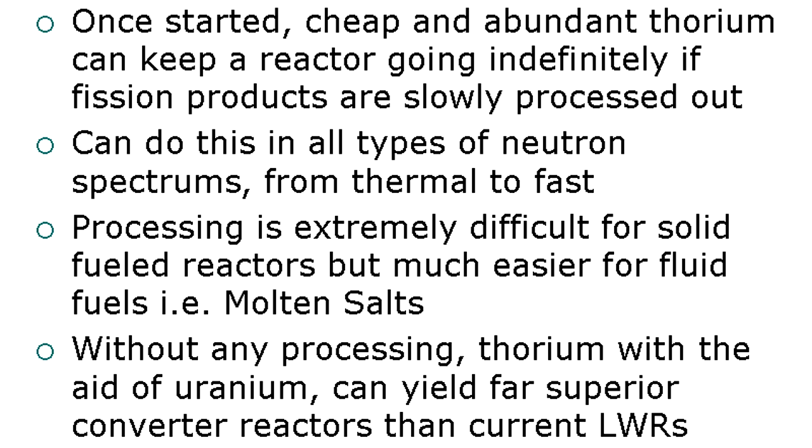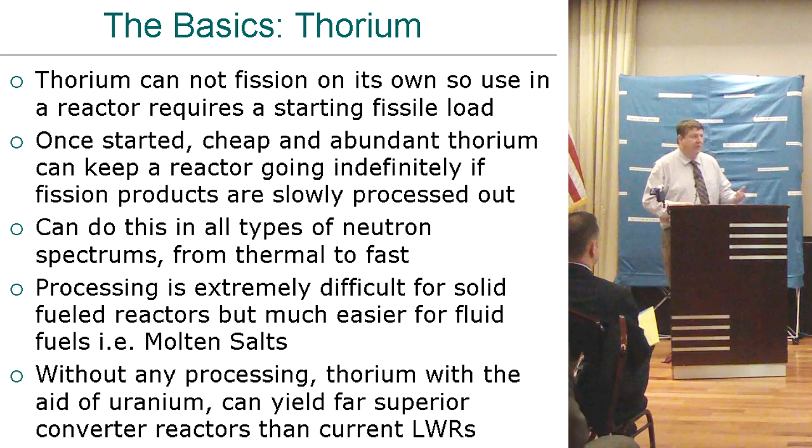Processing of thorium, or processing in general, is extremely difficult for solid fuel reactors. That's why there's a little bit of interest worldwide, but really not that much. But since we're dealing with fluids here, it's much simpler for fluid fuels like our molten salts. It's easier processing, but it's still a challenge, and there's going to be a lot of R&D money needed to bring that forward. Without processing, thorium can be used with the aid of uranium. A little bit of low-enriched uranium can yield far superior converter reactors, or the simpler burner reactors, than our current light water reactors, LWRs.

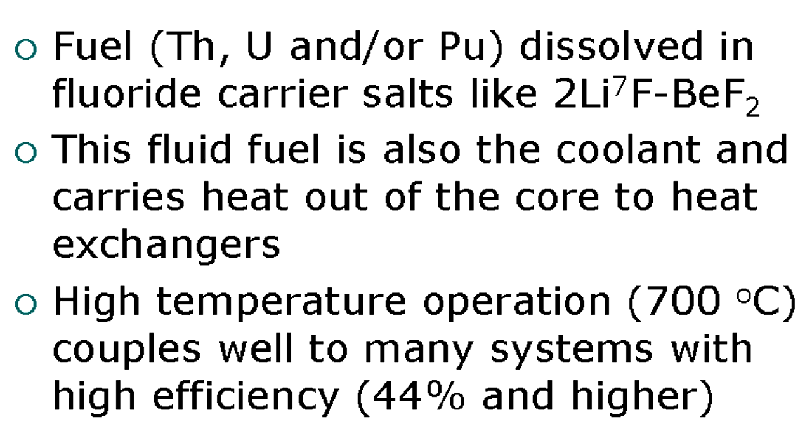Now, a little bit of basics about molten salt reactors. Molten salt reactor is the more broader term. LFTR is a bit narrower and a bit newer. But in general, our fuel, which is thorium and/or uranium and/or plutonium, is dissolved in a carrier salt. FLiBe is one of the examples, enriched lithium and beryllium fluoride. This fluid fuel is also the coolant, and it carries heat energy out of the core to heat exchangers.

It's a very high temperature operation, typically around 700 degrees, so that couples very well to almost any kind of power system you might imagine. A lot of us are going to be talking about Brayton systems, supercritical carbon dioxide, helium, etc., but it matches very well to general ultra supercritical steam as well, what the coal burners are using right now. So we can use off-the-shelf technology as well, even things like open air cycles.

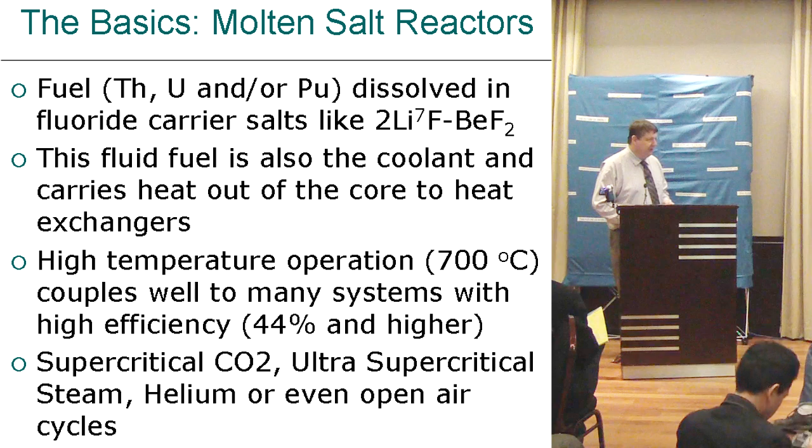The textbook design is called the single fluid, graphite moderated molten salt breeder reactor. This is straight out of the Gen 4 program, Generation 4 program, to look at advanced reactors for the future. This is one of 6 of them. In this design, the core itself is just a large tank filled with graphite logs, basically, that the fuel salt flows in, and in the reactor it's critical, so heat's generated.

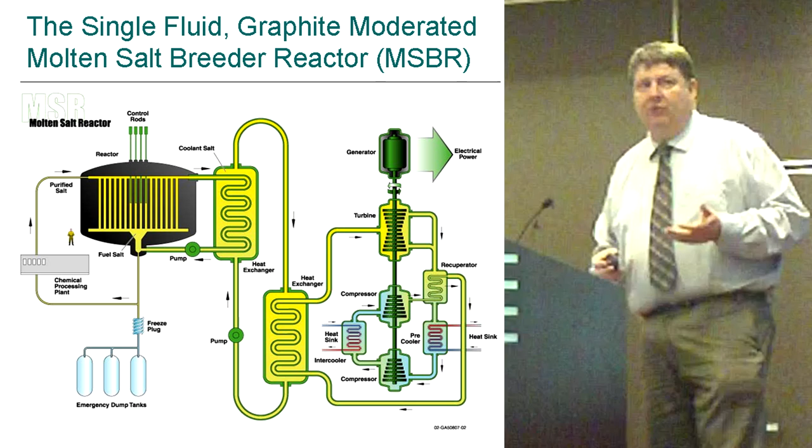Then that same fuel salt flows out to a heat exchanger, gives its heat to clean salt, and then that clean salt will either, in this diagram, go to a Brayton cycle, or like I said, could be steam, could be almost anything. Near the bottom we have this freeze plug. So basically if anything goes wrong, we lose power, etc., that freeze plug will melt, and the salts are drained to tanks that are specifically built to deal with that decay heat.

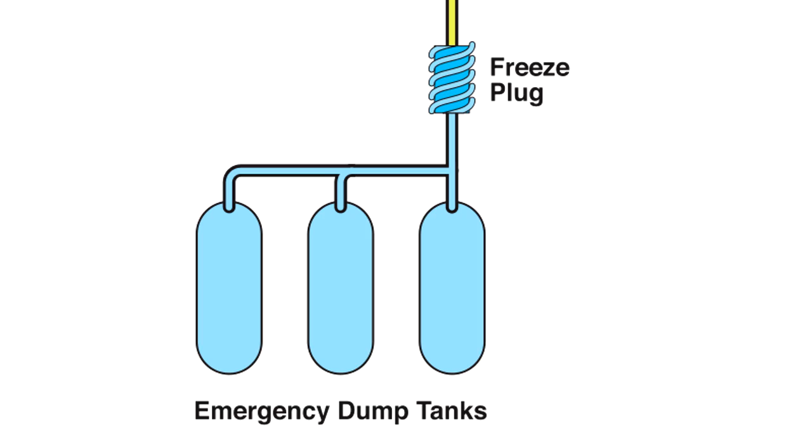There's a lot of design choices. One is breeder versus converter. Breeder means it makes your own fuel after you start it up. And if we just make just enough to keep going, that's nice because we don't have to worry about shipping out any fissile material, etc. We call that break-even breeding, and most of us feel that's the way we should be going.

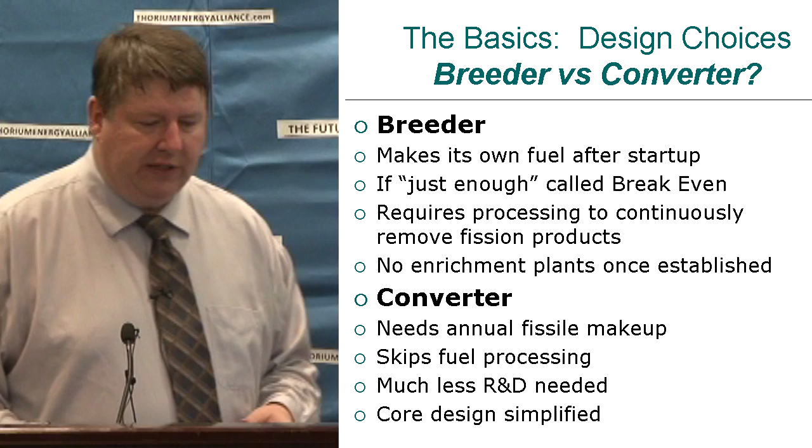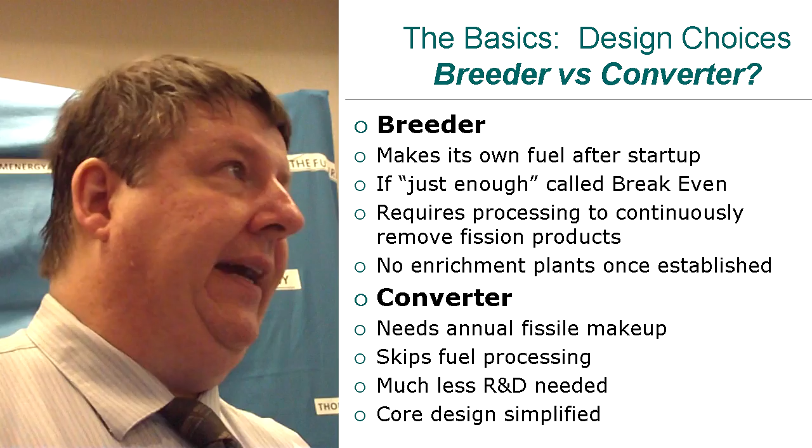That requires the processing of the fission products to continuously, fairly slowly, but continuously remove them. So we might need some enrichment plants now to get them going, but once we're going on them, we don't need enrichment plants anymore. Converter reactors, on the other hand, need some annual fissile makeup, which is typically going to be low-enriched uranium. But that skips fuel processing, or at least skips it for decades, and we do it once at the end of the sort of lifetime of the salt, etc.

Much less R&D needed, much simpler designs. We're much more ready to go with things, and the core design is typically much simplified. There's also what we call the single fluid or two fluid, and even confusing, there's something called a 1.5 fluid. Single fluid, everything is one carrier salt, as is fairly obvious. The core design is typically a fair bit simpler this way.

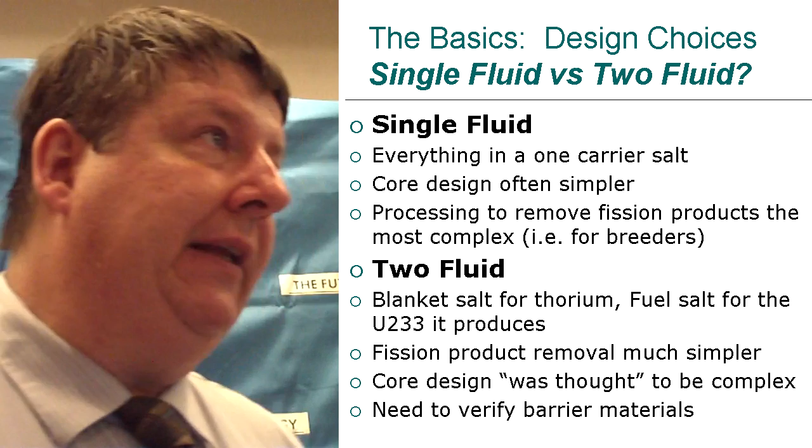Processing to remove those fission products is a lot harder. It's not as hard as with solid fuels, but it's the hardest way with liquid fuels, because thorium itself is very chemically similar to the rare earth fission products that are the most important ones to remove.

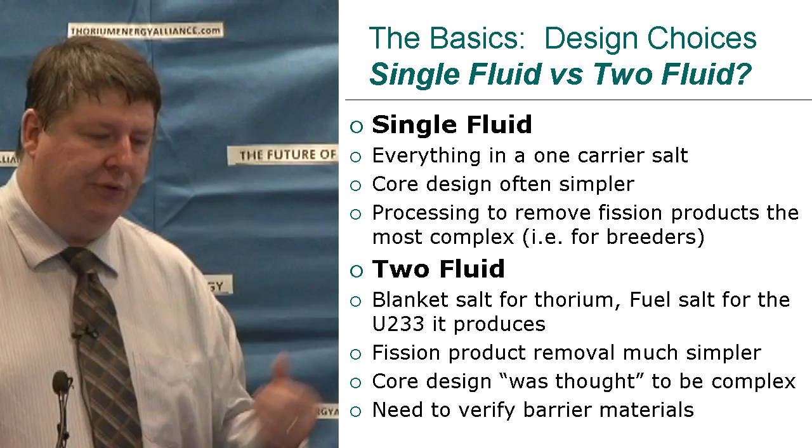Two-fluid designs, on the other hand, have a separate salt for the thorium that catches neutrons, and a fuel salt for the uranium-233 that the blanket salt produces. Fission product removal is a lot simpler because the fission products are produced in the fuel salt and there's no thorium there, so it's a lot easier.

Core design was thought to be a lot more complex. What Oak Ridge looked at - they developed these in the 50s, 60s, and 70s - was very complicated. We think there's a lot easier ways to do this now. But with pretty much any kind of two-fluid design, we have to verify these barrier materials. It could even be graphite itself, but there are a lot of different choices to separate those two salts. Shouldn't be very hard, but it's something we need to do, and anything nuclear can be quite expensive.

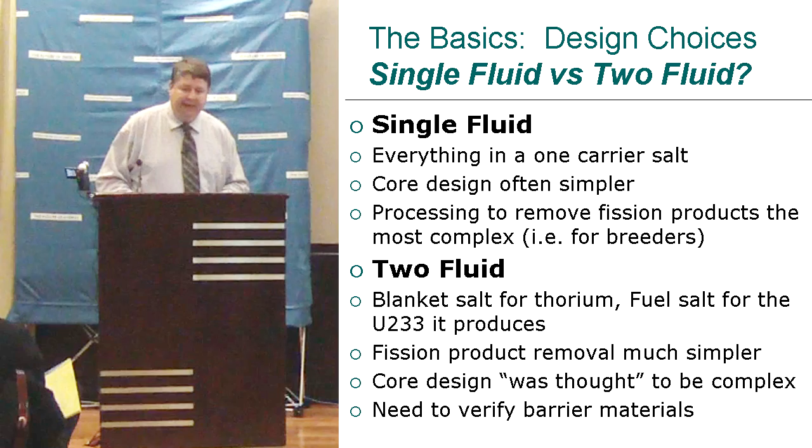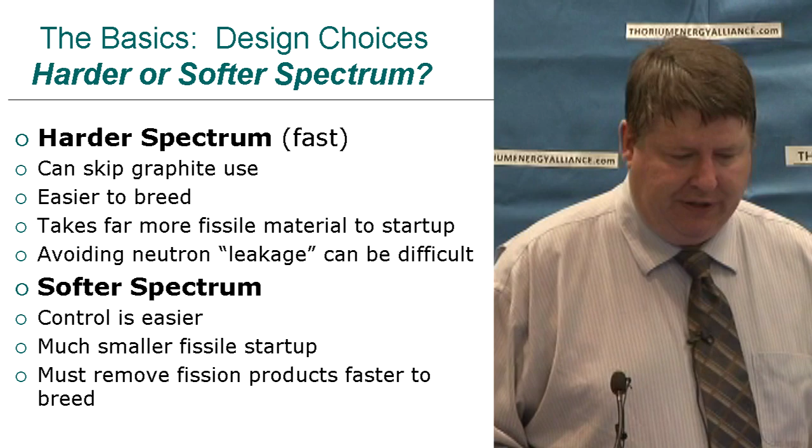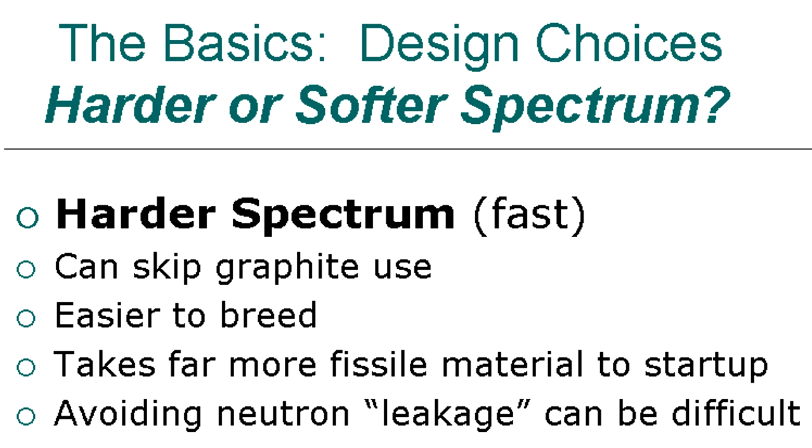Then we have either harder or softer spectrum, between thermal and fast spectrums. With a harder, or fast, spectrum we can skip using graphite. Graphite's not really that hard to use with these reactors, but if we can get rid of it, it's probably a good idea too - just one less thing to worry about. It's easier to breed, we get more neutrons per fission, etc., although it typically takes a lot more fissile material to start up, with some exceptions, but that's a general rule of thumb. And avoiding what I call neutron leakage can be a problem. In a harder spectrum design, especially in the single fluid, it can be harder to avoid losing a lot of neutrons to leakage - we have this neutron budget we have to worry about.

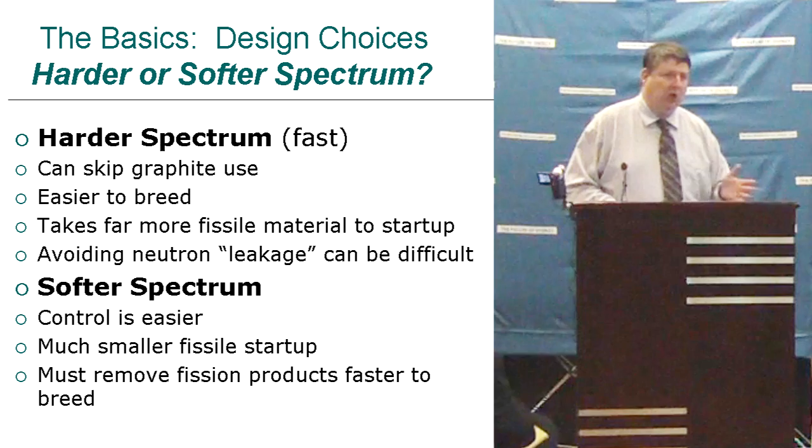With a softer spectrum, control is a lot easier as well. Things happen a lot slower with thermal neutrons. Much smaller fissile material needed to start up, but we need to remove those fission products faster if we want to breed or break even.

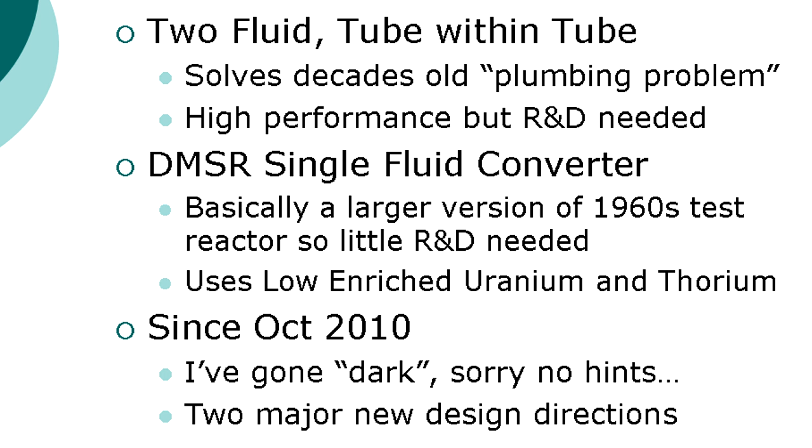Now, my main design efforts have been in a two-fluid design, what's called a tube-within-tube. Hopefully it solves what Oak Ridge often termed their plumbing problem, which is the complexity they had to deal with. It's a very simple geometric sort of trick, in a sense, to get good size power cores out of this two-fluid design with much simpler plumbing, so to speak. I consider it high performance, biggest bang for your buck, but there's significant R&D needed in this design, and in most designs.

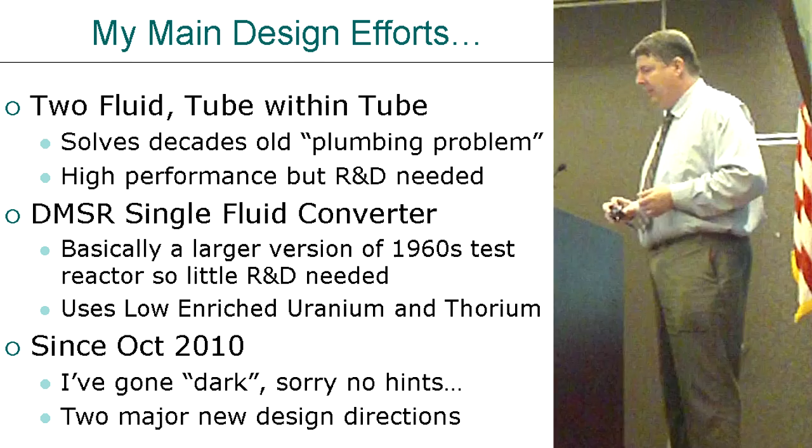My other main focus for the last couple of years has been on what's called the denatured molten salt reactor, DMSR. This was developed in the late 70s at Oak Ridge National Labs. It's a really simple design - basically just a larger version of the test reactor they built in the 60s, so a lot less R&D needed. It doesn't break even though, so it needs a little bit of makeup fuel, which is low enriched uranium, very, very much available. So it uses a mix of low enriched uranium and thorium. Most of the energy comes from thorium, but it's helped along by that low enriched uranium.

Now, since October 2010, though - to use a term Jim Kennedy was using about the Chinese sometimes - I've sort of gone dark. I've been working on a lot of new areas, but instead of going public right away with a lot of them, I'm keeping things a bit secret. So sorry, no hints, but quite excited, looking forward to sharing these with you.

Now, how do you judge a reactor in general? That then guides us to what sort of design criteria we should choose. Of course: safety, cost, resource sustainability, and long-lived waste. I think these are really the most important, and pretty much every design we look at with molten salt reactors, these issues are very similar.

What can be a little bit different between designs is proliferation resistance. We have a good story in all our different types of designs, and it's a bit of an apples and oranges comparison - hard to make a really detailed comparison, but I think some can be labeled as extremely high proliferation resistance. Rapid deployment capability: if we want to build these by the hundreds or thousands to really make a difference, can we? There can be some differences there. And then technological uncertainty - how much R&D we're going to need to move forward.

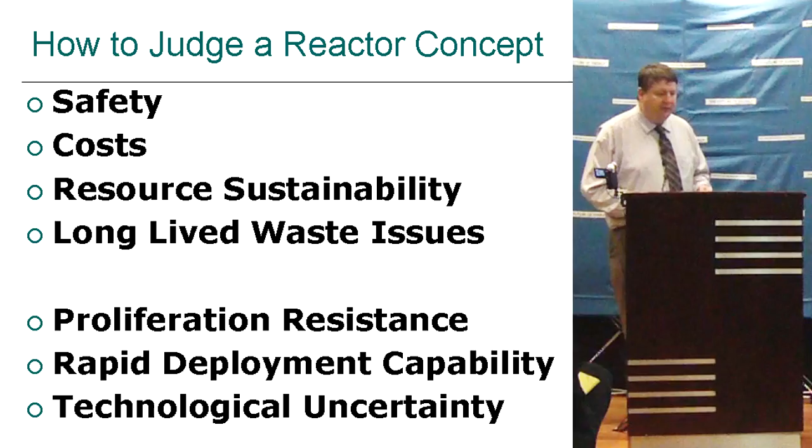Now, as I say, advantages of all molten salt reactors is the safety. We don't have large pressure vessels that could possibly fail. There's really no chemical driving forces here. We have no water, so no steam or explosions or hydrogen production. We have no zirconium water interactions, etc.

The graphite can technically burn, but that's about all it can do, and it's very simple to avoid that. And of course, some of our designs don't even have graphite.

There is almost no volatile fission products in the salt. All these accidents, Chernobyl, Fukushima, it's the volatile things that go off into the air and spread out. That's the real issue. It's almost impossible to imagine how radiation can be spread from a nuclear reactor beyond these things. They get into bizarre scenarios, the corium hitting water in a certain way, water getting inside the corium and then exploding. They really have to be imaginative beyond these volatiles.

But with the molten salts, those volatile elements come out naturally while we're running. We collect them and store them completely separate from the reactor. So if anything goes wrong, even a terrorist attack, a missile strike, etc., you might splash some salt around, but it basically lands and hardens, and very, very little will come out of it.

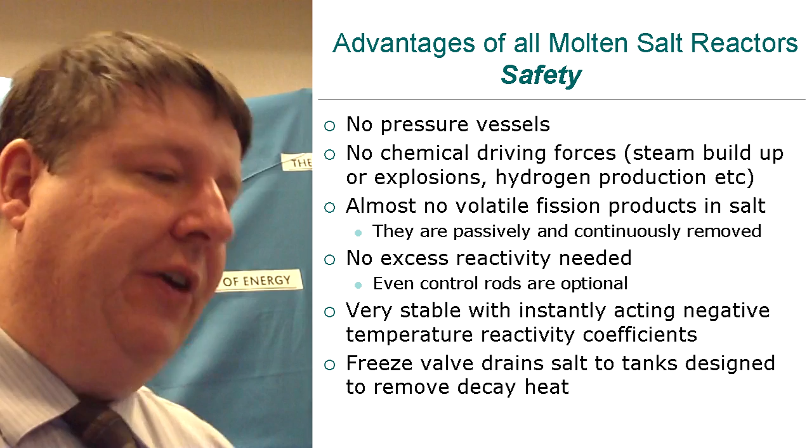We don't need any excess reactivity. There's no sort of shim rods or control rods that could be accidentally removed. We don't need any of that. They're very stable with instantly acting negative temperature reactivity coefficients. And again, we have that freeze valve to lead the core, lead the heat to where we can deal with the decay heat best.

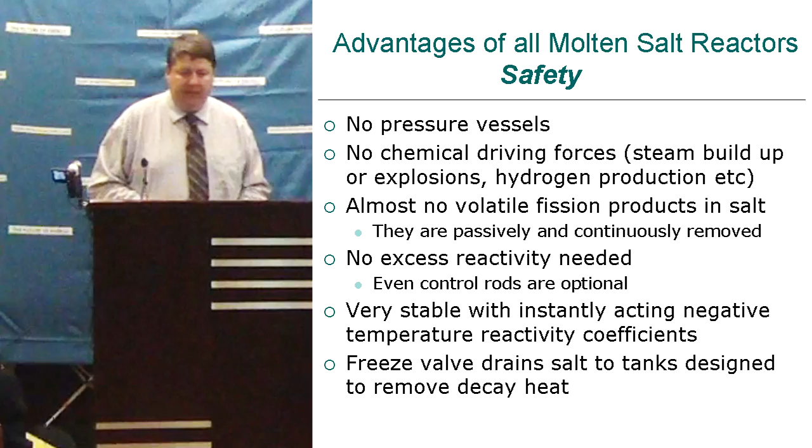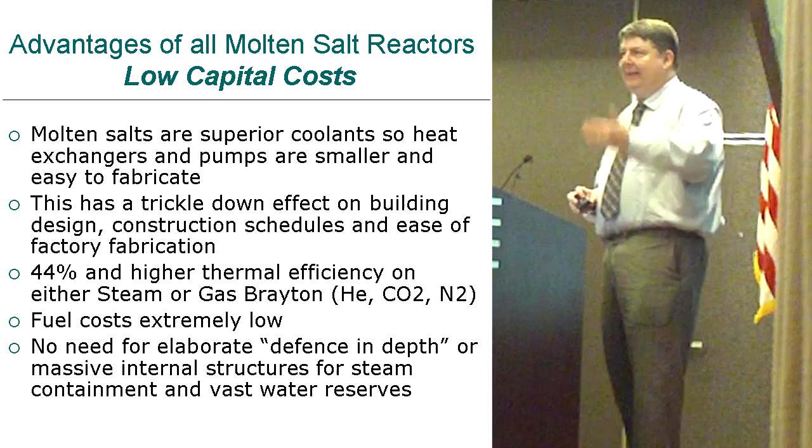Low capital costs. Molten salts in general, this is not quite as well known, are just excellent coolants, much better than water, much better than liquid sodium, etc. So your pumps are smaller, the heat exchangers are smaller, and that makes things a lot easier to fabricate. This has a trickle-down effect on your building layout, construction schedules, factory fabrication, etc.

Of course, we have a much higher thermal efficiency, 44%. We could probably push 50% with these, given our various choices, and that's another wonderful thing, that we have so many choices. And of course, the fuel cycle costs are very, very low, with no need for defense in depth or these massive internal structures to deal with steam containment and vast water reserves, since here things happen by physics, not by engineering design.

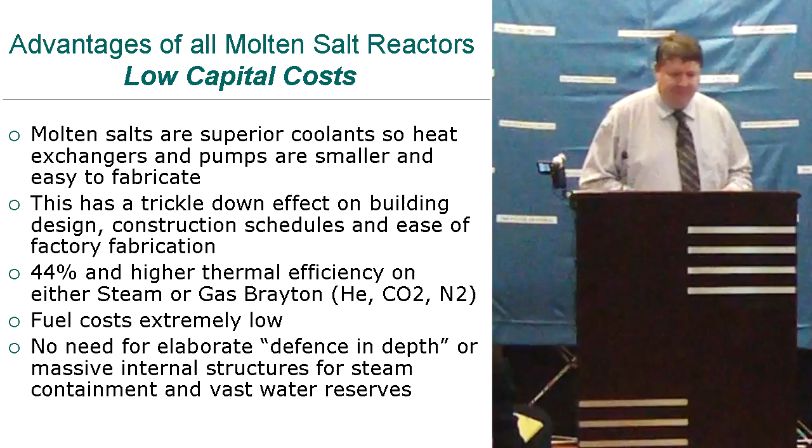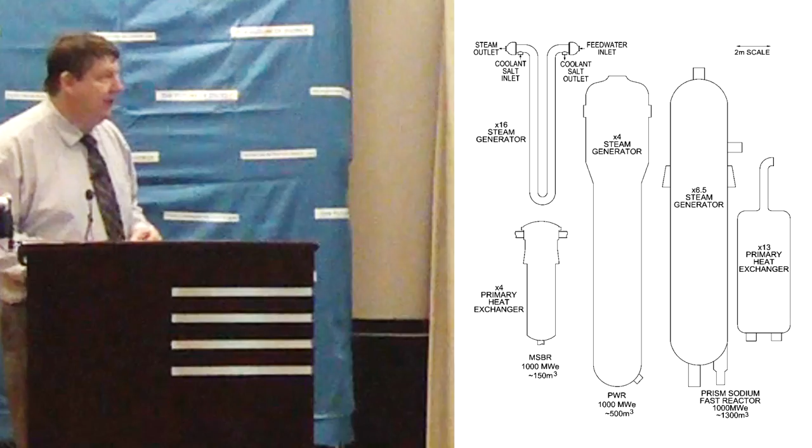Just looking at the size of the heat exchangers on the far left, we have the primary heat exchanger. We need 4 of those for a 1,000 megawatt plant and 16 of these tiny little steam generator tubes, versus in the middle 4 of those very large 70-foot tall steam generators that the PWR folks need to work with. And the sodium cooled fast reactor people love to show how tiny the reactor is itself, but they tend to neglect showing the absolutely massive water-to-liquid-sodium steam generators and their primary heat exchangers as well. So their volume is just an enormous factor compared to ours.

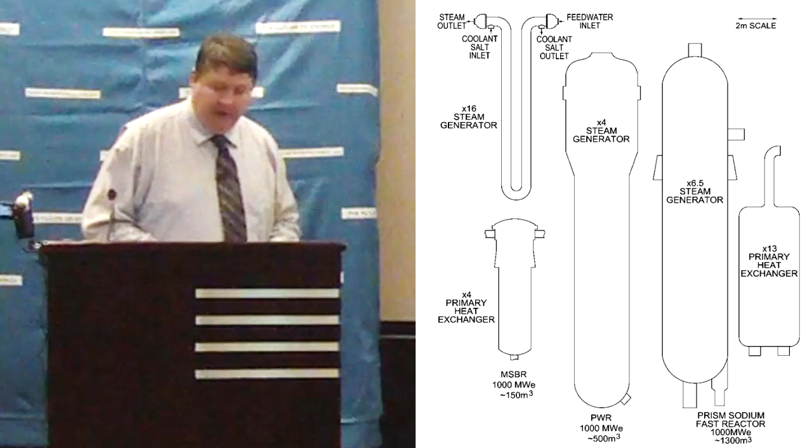Resource sustainability: once we start these breeder reactor designs, running them as breeders, all we need is minor amounts of thorium a year. About $30,000 worth of thorium gives you, depending on your price per kilowatt, about $500 million worth of electricity. Converter designs are a lot simpler and do require some uranium, but very modest amounts. Typically, Oak Ridge's base design, which we can improve on, was about 35 tons of uranium per gigawatt year for a 1,000 megawatt plant running a year, versus about 200 tons for light water reactors. That gets a fuel cycle cost under 1/10 of a cent per kilowatt hour, so there's not too much room for improvement there anyway.

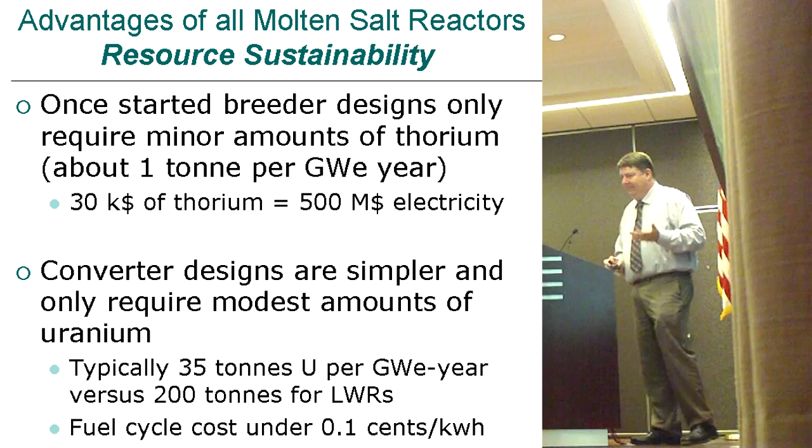And I would bring that up: uranium is not really the enemy. Thorium isn't amazing on its own, but these reactors can help us use uranium a lot better as well. We're not going to run out of uranium in 80 years. We can run out of cheap uranium, and that can start to hurt the light water folks because they need so much of it. But if you can find some competent geologists who know their field, they'll tell you there's no way uranium could ever be really more than $500 a kilogram, because then we'd have so much low-grade ore that would become economically viable. And even at $500 a kilogram in these designs that use it, that's still only a couple tenths of a cent per kilowatt hour.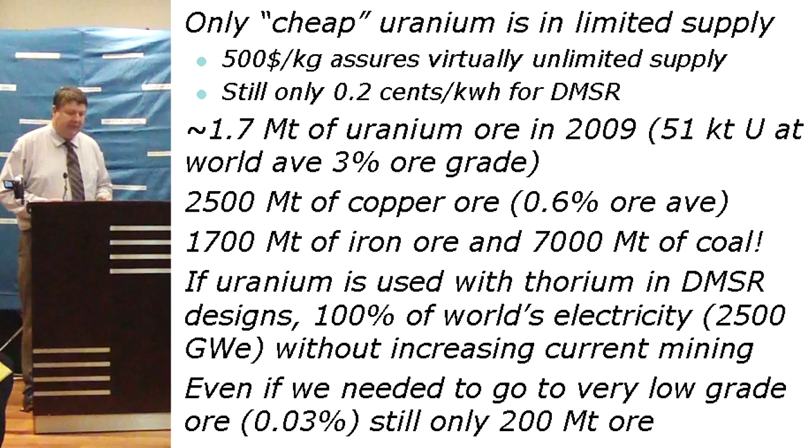Now, mining is maybe not pretty in general, but 1.7 million tons of uranium ore was dug up in 2009, at a world average of 3% ore grade. You have to compare that. Mining's not pretty, but there's 2,500 million tons of copper ore, 1,700 million tons of iron ore, and 7 billion tons of coal. So the mining picture here is a pretty minor one.

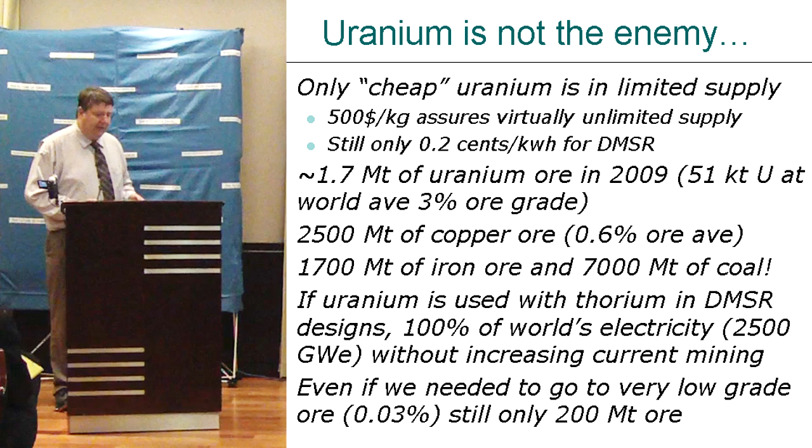And if uranium is used with thorium in the DMSR designs, we could have 100% of the world's electricity, 2,500 gigawatts, without increasing the mining we're doing already. And even if we needed to go over to very low-grade ores where it might cost $500 a kilogram, there's almost unlimited supplies then, that's still only a couple of hundred million tons of ore mined per year.

Long-lived waste, that's another great story for molten salt reactors, LFTR in general. The fission products are very similar to almost any reactor design, but they're almost all relatively benign after a few hundred years. The real problem is what we call the transuranics, things above uranium, neptunium, specifically plutonium, and even above that. That's the real reason you have Yucca Mountains, which are repositories. They're built so that 100 years later we can come back and take that out, because you also don't want to bury plutonium for generations.

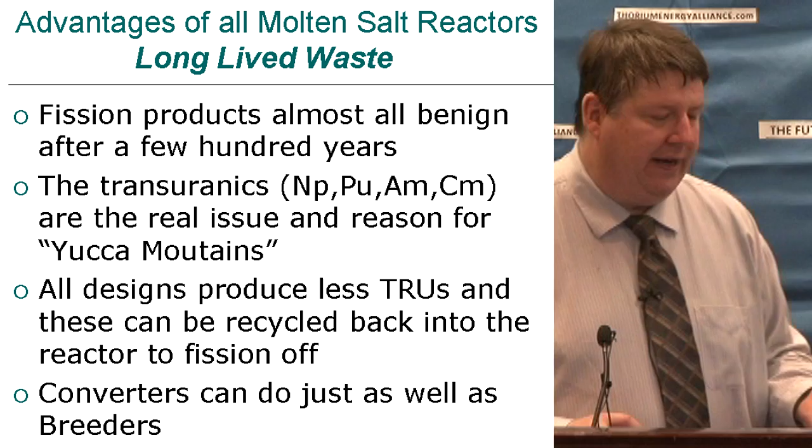All the molten salt reactor designs produce a lot less transuranics, and we can all just keep them in the salt, or every time we process, make sure we put them back in the salt. It's surprising to many, but I can show you the numbers if you don't believe me.

Converters can do just as well as breeders in that. Converters will produce a little more plutonium a year, but you only have to process it every 10, 20, 30 years, so the picture can look just as well.

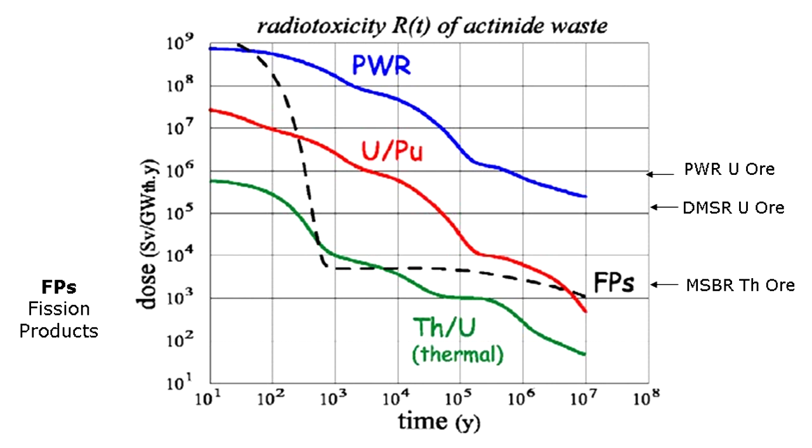And the DMSR design, we can do pretty much as well as the breeder, but we actually destroy a lot more natural radiotoxicity. So it's probably the only reactor design in the world that can claim that when you run these reactors, 300 years later, when the fission products have died away, we've actually lowered the world's radiotoxicity. No other design. So we're doing the world a favor doing that.

Now, proliferation resistance is mainly a political issue, okay? If a country wants it, they're going to build simple graphite pile reactors, etc. It's not really a technological issue. But that said, we still should do whatever we can to maximize proliferation resistance of designs.

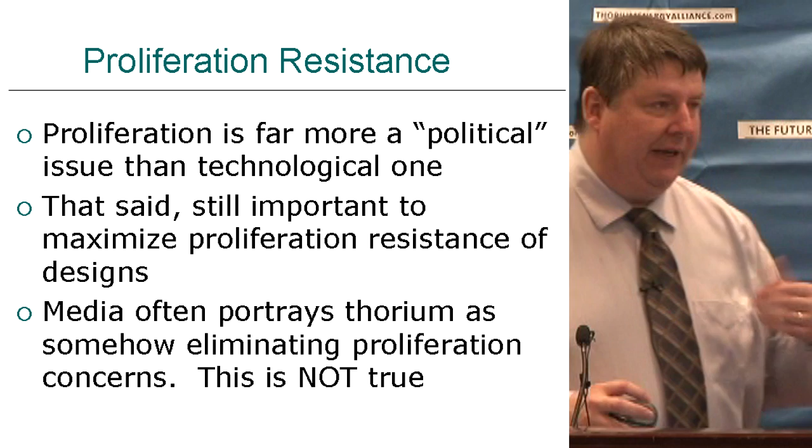Now, I will mention, though, that the media often portrays thorium as somehow eliminating proliferation concerns altogether. This is not true, and that's important to understand. It can really help us, but it's still something we have to be vigilant about.

Proliferation resistance of the pure cycle, what we might call the breeder cycle, the big benefit is from something called uranium-232. It's there a long time. It's got a 69-year half-life, and one of its daughter products makes a really high-energy gamma ray. Extremely easy to detect if anyone was trying to smuggle this around, and makes it really hard to work with. And no national program has ever been based on uranium-233.

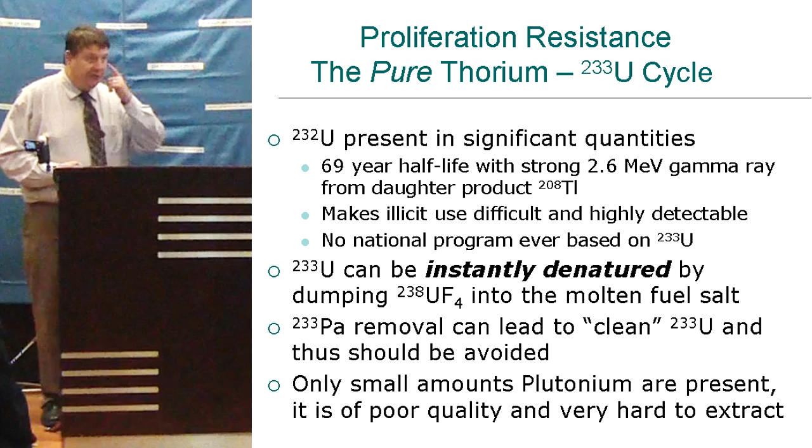We can also instantly denature these by dumping in uranium-238, and that makes the uranium useless for any kind of weapons. Protactinium removal, I won't get into details here, but that can be eliminated in any design, even single fluids, believe it or not, for those that know a little bit here. But that should be avoided because that can lead to what you call clean 233 that doesn't have that 232 contaminant. And in these designs, there's only small amounts of plutonium, and it's really, really poor quality, pretty much impossible to even ever imagine. Denatured cycles, though, and this includes the converter designs, with the pure cycle, it does represent highly enriched uranium.

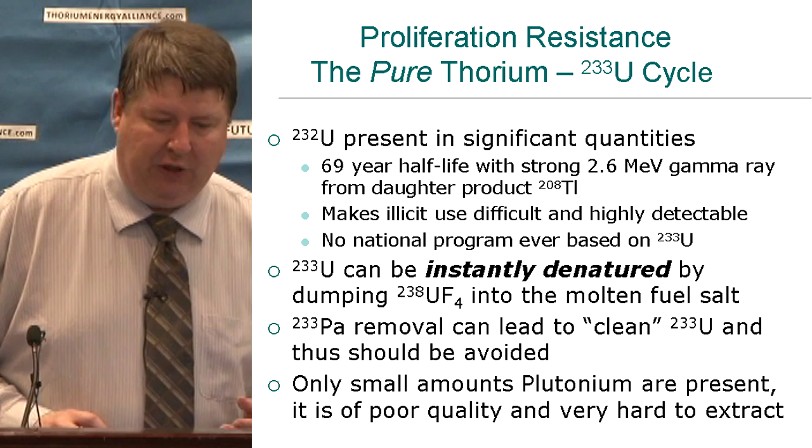Those three words together will be a non-starter for a lot of people, and it'll be hard to even get them to look at things. But if we run them denatured, there's pros and cons to that, but that makes any uranium completely useless for weapons. It does mean we're going to have a bit more plutonium, and it's surprising that there's not a big difference in how much plutonium will be in the salt, but plutonium is a lot harder to remove from the salts than uranium, and it's really poor quality plutonium. It's debatable whether light water reactor plutonium in the waste could ever really be used to make a weapon.

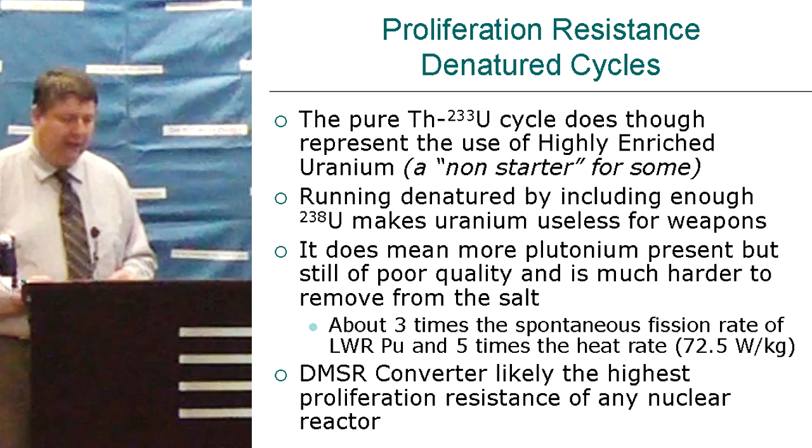In the DMSR approach, it's much poorer. It's about triple the spontaneous fission rate that makes things go prematurely, and a lot more heat production. The DMSR approach has been singled out in some studies as probably being one of the highest proliferation resistance of any possible reactor. Rapid deployment capability is basically how much fissile we need to start it.

There's also the technological issues. MSRs of any type design are a lot easier to build than light water reactors, but one of the differentiators is how much fissile to start and what type. We don't really have any U-233 in the world. There's a little bit here that we're trying to save in the United States. Spent fuel plutonium, everyone talks about that, but it's quite expensive to get at, and it's also somewhat limited.

Fast spectrum, single fluid, or 1.5 fluid designs, they need a lot more fissile material to start, up to about 8 tons per gigawatt electrical. It's still a little less than the fast breeder guys, but it's still a lot. It would impede development. 2 fluid breeders, or any denatured design, we can start those with low enriched uranium. That's another advantage of the 2 fluid design.

And then another thing, can we make these small to start? There's differences there. The 2 fluid designs with what I call a full blanket around them, we can make them pretty much as small as we want. Please don't start thinking we're going to have them in your basements or your car - that's ridiculous, but we can make them quite small power.

Single fluid graphite converters, the neutron budget gets worse as you get smaller, but you're not trying to break even, so yes, we can make those pretty small. The conventional design, the single fluid graphite breeder, and to break even - that is actually very hard to make them very small, of course, at 100 megawatt size. And the single fluid fast breeder, the French have the most well-known design, that's very hard as well.

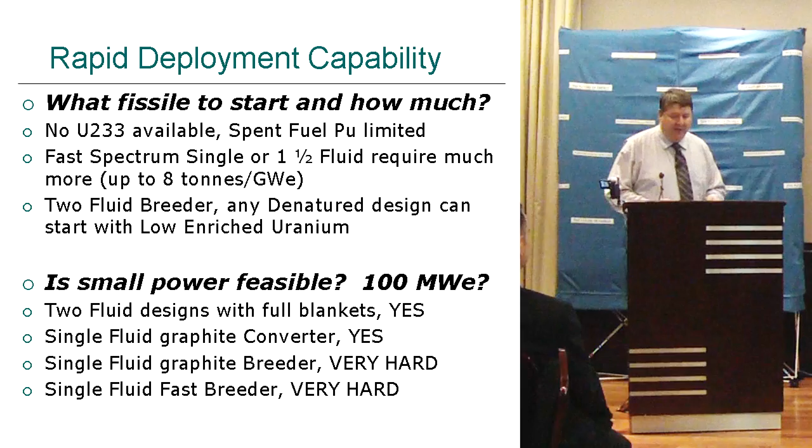Technological uncertainty, that I think is the biggest differentiator in these designs. R&D in nuclear power is expensive, so if we can minimize this, at least for the first generation of designs, we should do that. Fission product removal does need a lot of R&D. Even the 2 fluid design, it's a lot simpler in that design, but there's still a lot of work that needs to be done there before you'd have a commercial design.

Only single fluid graphite designs don't really need a material that has to be verified as some sort of barrier material in a strong neutron fluence. Going beyond 700 degrees, which the French design is pretty much forced to go in that direction, you're getting into areas where we don't know the material science that well - a lot to prove there. If graphite is used, there's different designs that will or will not - we either have large cores where we don't have to ever change the graphite, or we have to prove these replacement technologies.

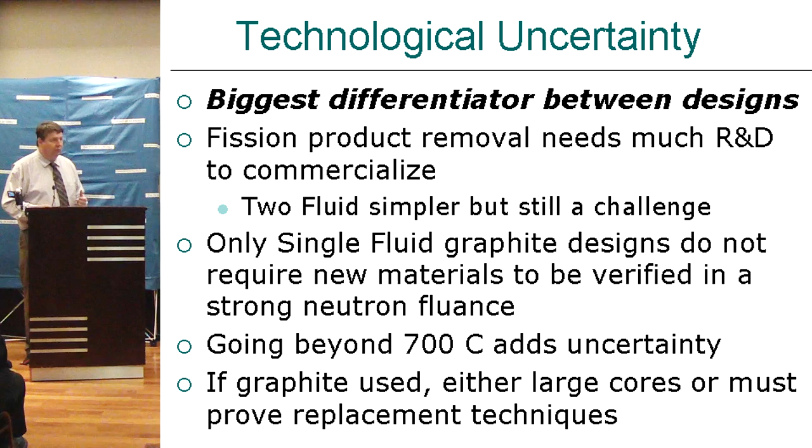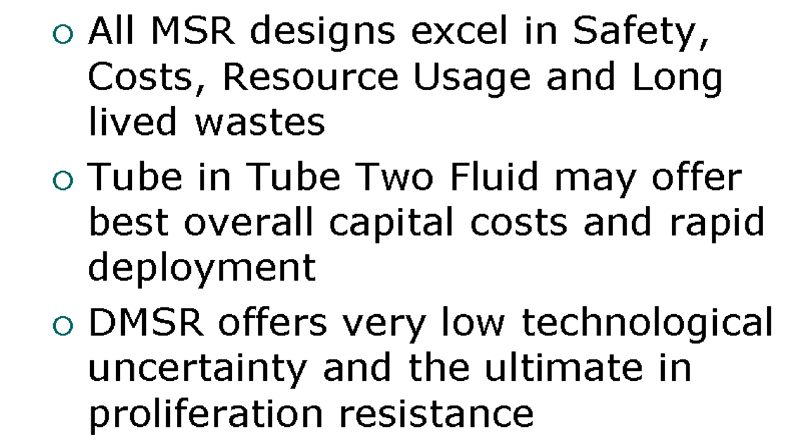In summary then, all molten salt reactor designs excel in safety, cost, resource usage, long-lived waste. I think the tube in tube, what I've been promoting, two-fluid design, may offer the best overall capital cost and rapid deployment. And then the simpler design, the DMSR design, offers the very lowest in technological uncertainty and really, really high proliferation resistance. They all are high, but I think this is the absolute highest.

The inherent features, the physics of them itself, favor the overall safety, waste reduction, cost, and deployment. But they also have a lot of flexibility. We can attain the very highest levels of proliferation resistance. We can run on minute amounts of thorium or modest amounts of uranium with thorium for the utmost in simplicity.

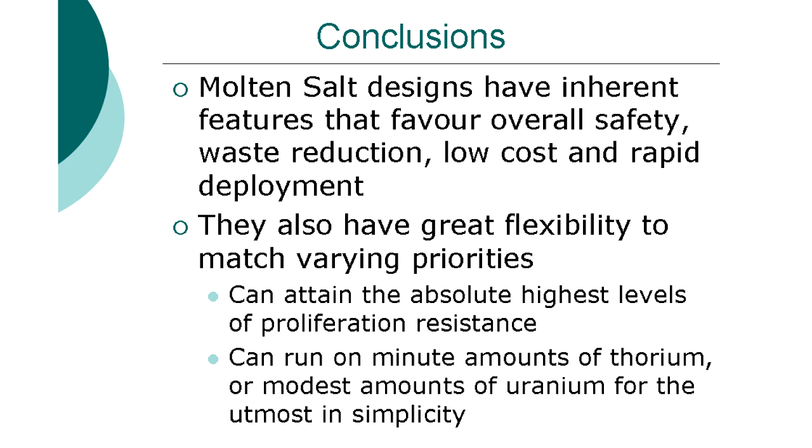There's a lot of things going around in the back rooms that many are not aware of. It's exciting times, but sorry, not quite ready for public disclosure. So, but that's all I have to say for now. Hey.